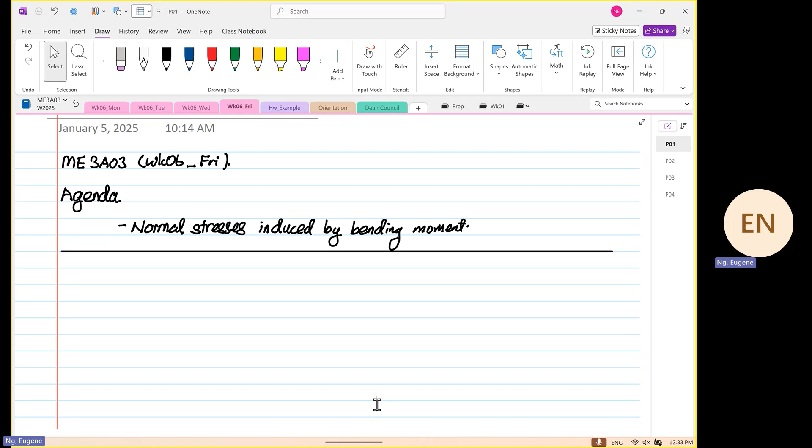Okay, as I say, tentatively, I have to change the date. I realize that some of you have a stats course. Okay, right. So today we are going to do something different. No more Mohr's circle. We will come back to Mohr's circle later on; we're going to apply it later on. So today we are going to look at normal stress induced by bending moment. So it's more of a, what do you call that? Revision. Some of you have taken 2P last term. It will be very quick. Those of you in engineering and management, you're like, oh, I've taken this about a year ago, I can't remember. Okay, don't worry. I'll get you up to speed.

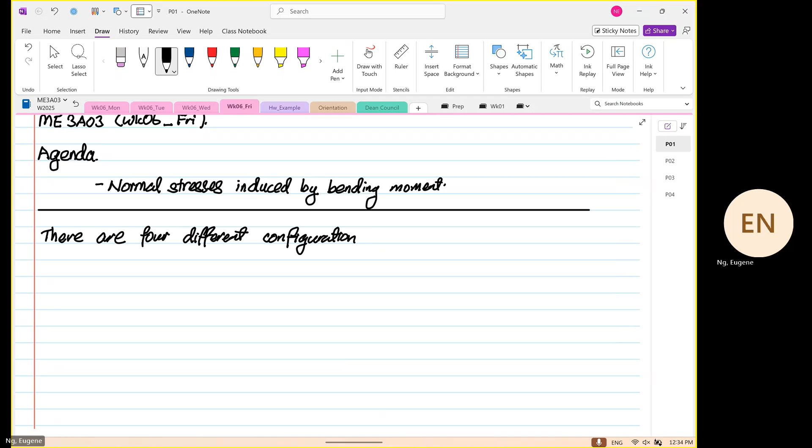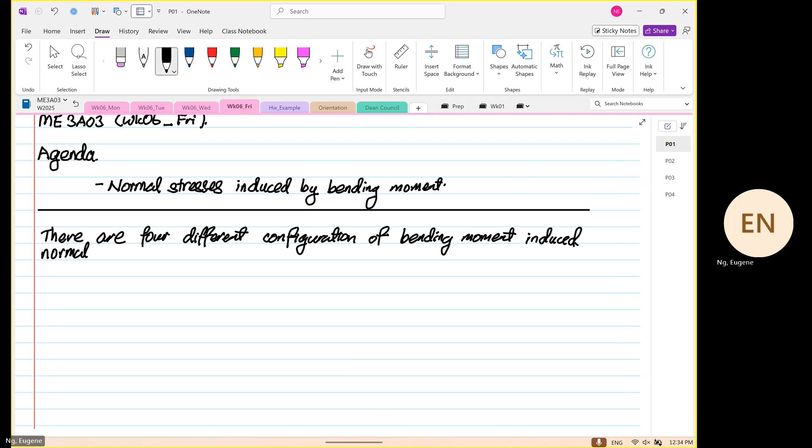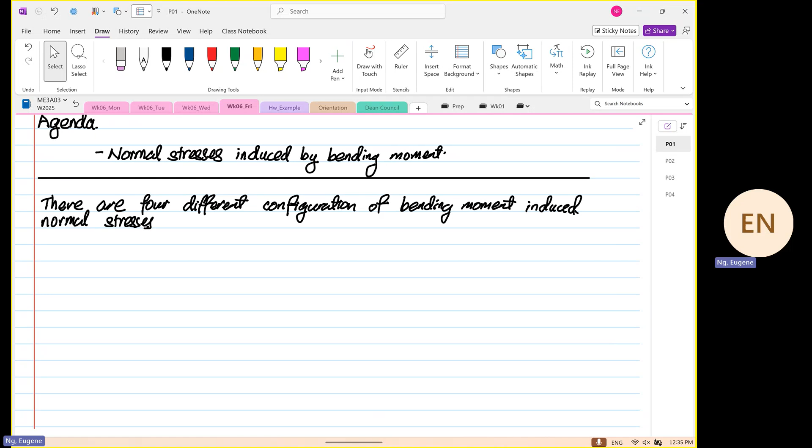Okay, so there are four different configurations of bending moment induced stresses, or induced normal stresses. Okay. So if I were to write out the general formula, stress X will be equal to Px over A plus minus My over Iyy multiplied by Z, and plus minus Mz over Izz multiplied by Y.

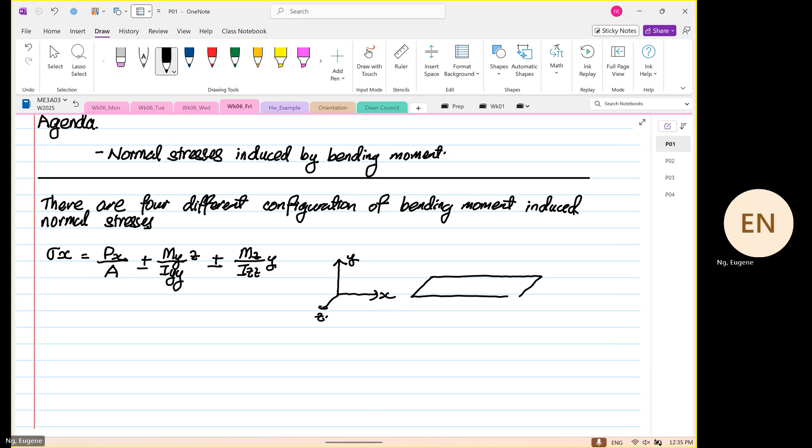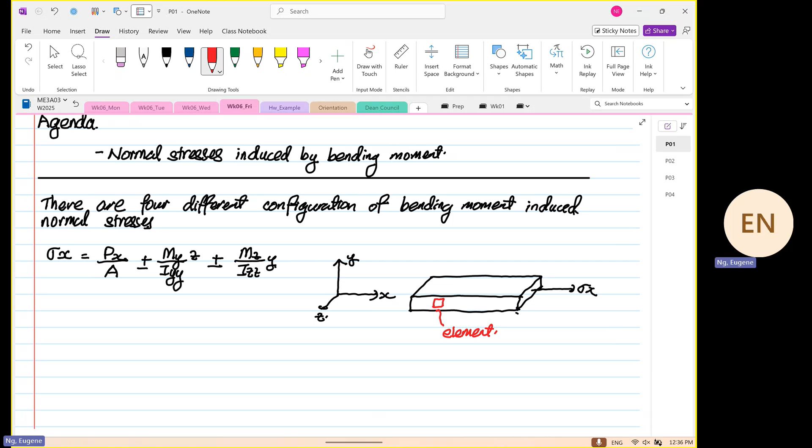Okay. So this will follow a configuration like this, where this is X, Y, and Z. And we have a structure looking like this. This is just an example. So the direction of stress X, as you can see, we are looking at stress X over here. So if we were to put an element like what we have learned before, this is an element now, to make you relate to what we have just learned. So that is the general form of the formula.

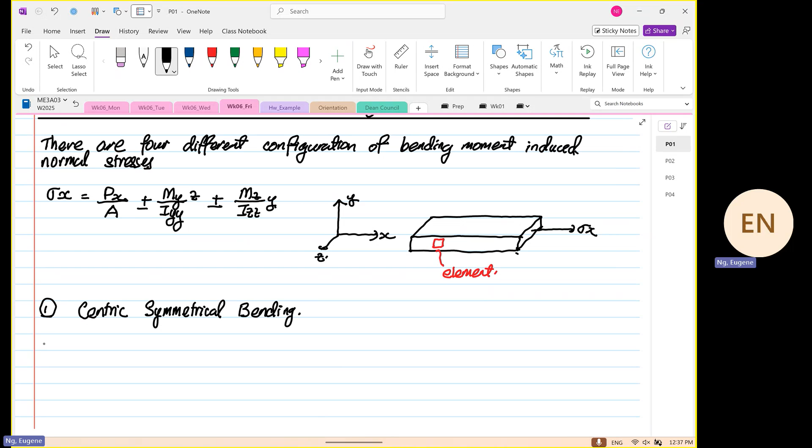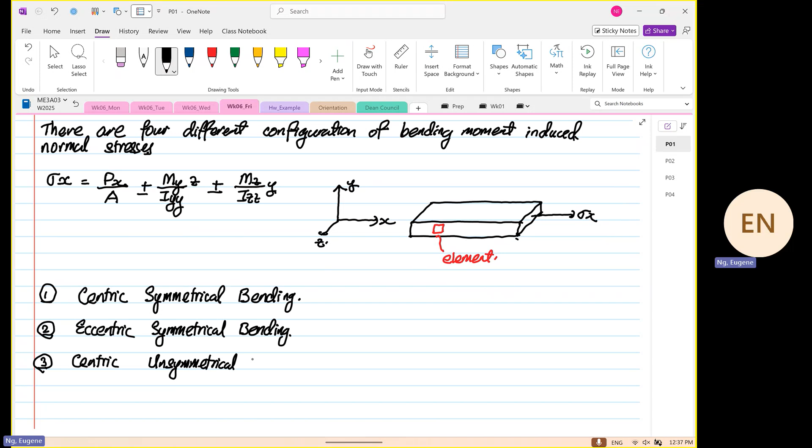So in bending moment, as I mentioned before, there are four different configurations. One is what we call centric symmetrical bending. The second one is what we classify as eccentric symmetrical bending. The third one is what we classify as centric unsymmetrical bending. And the fourth one is eccentric unsymmetrical bending. Okay.

So if we were to write the general formula for this, I'm going to build up on the formula. So let's say we have stress X in condition number 1, stress X in condition number 2, stress X in condition number 3, stress X in condition number 4. If we have something that is known as eccentric, we always have the term Px over A.

So i.e., anything that is eccentric has axial loading and bending moment components.

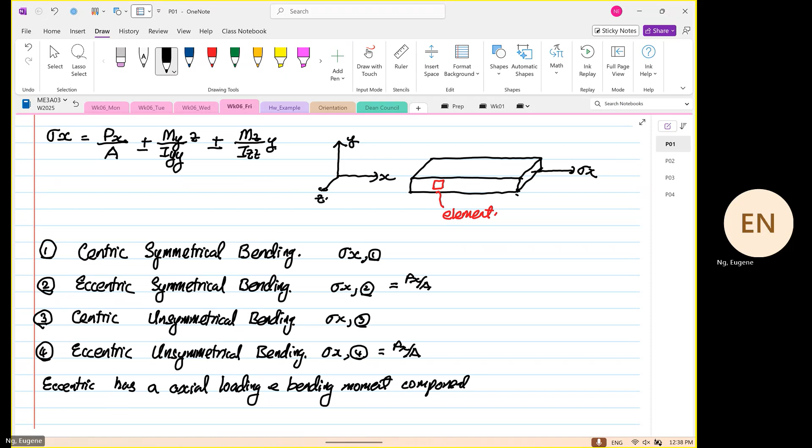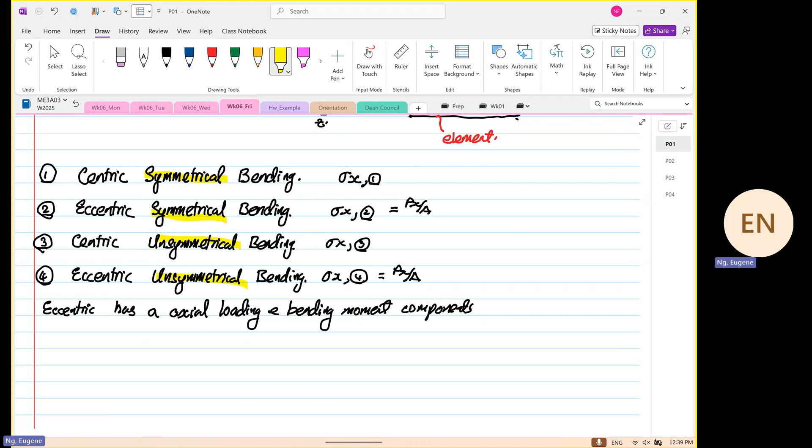Okay. Now it comes to the next term that you'll see, symmetrical and unsymmetrical. Yes or no? Those of you that have done 2P, Dr. Koshi will use the term symmetrical and what? Unsymmetrical. Now, when is it symmetrical and when is it unsymmetrical? Okay, so I'm going to draw cases, and you tell me, is this symmetrical or unsymmetrical? And we start from there. So now I'm going to draw 3 different loading conditions.

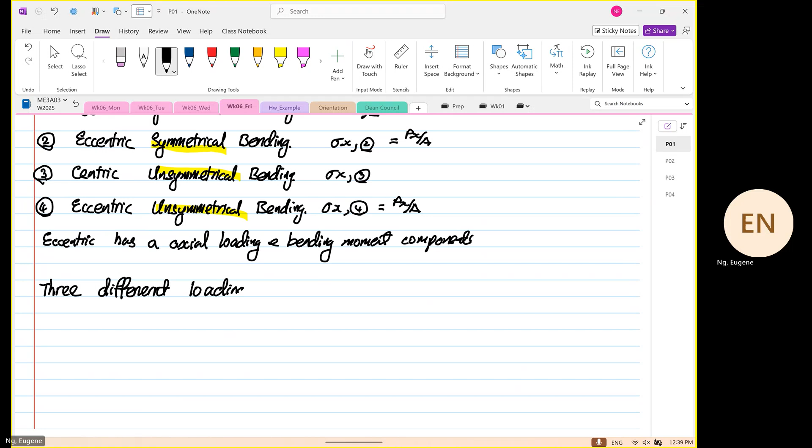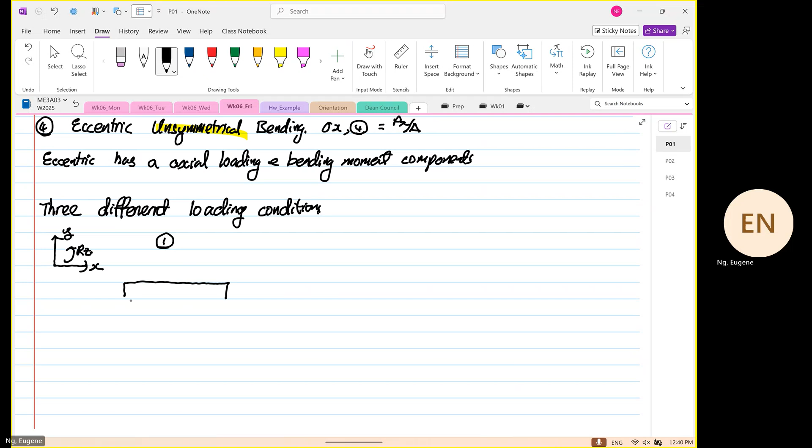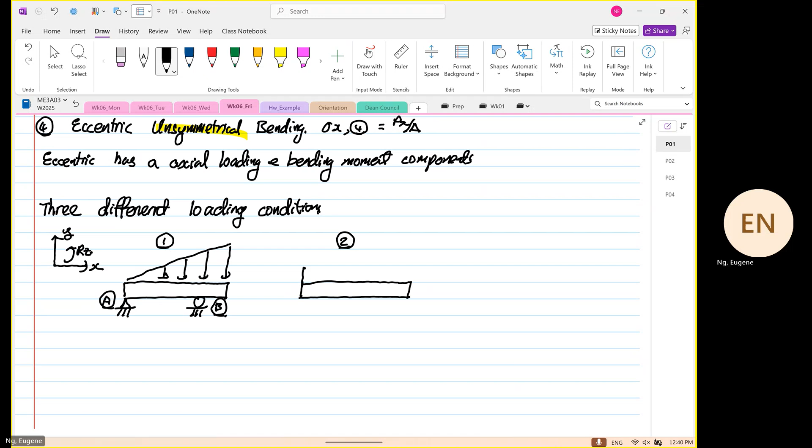Okay, so the first one looks like this. Before I do number 1, I'm going to declare that this is our X and this is our Y, followed by our rotation in the Z. So this is number 1. Number 1, you have a load looking like this. Point A, point B. And then the second one, we have a load looking like this. Point A, point B, okay?

And case number 3, we have a load looking like this. And I'll declare that from here to here is L/2, and from here to here is L/2, and this is our L. From here to here, this is L/2. From here to here, L/4. From here to here is 2L. And then from here to here is L. Okay.

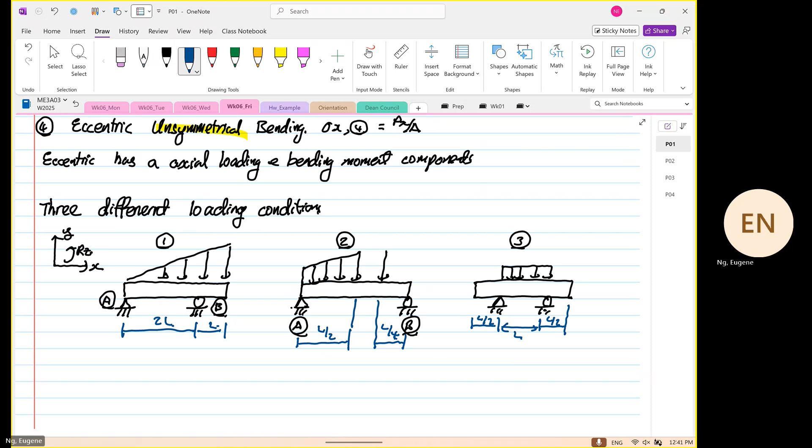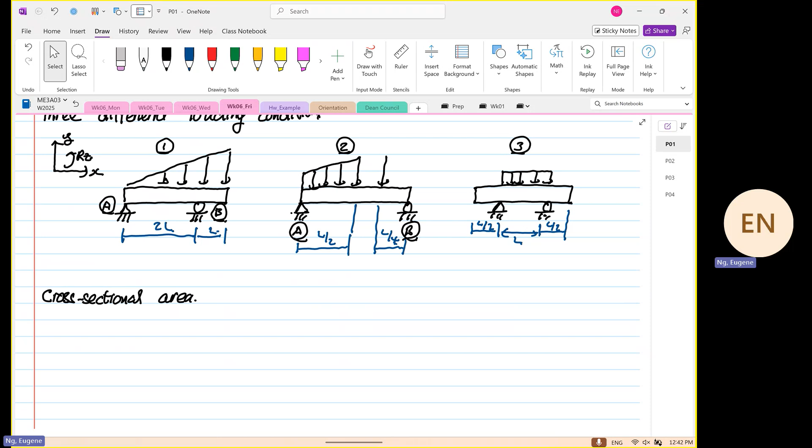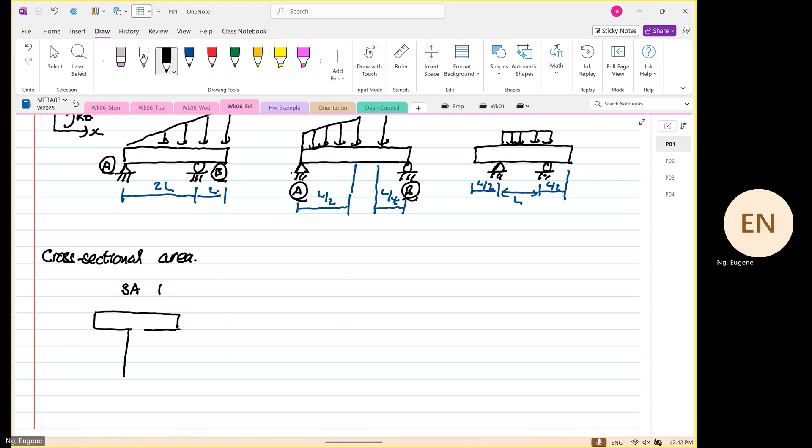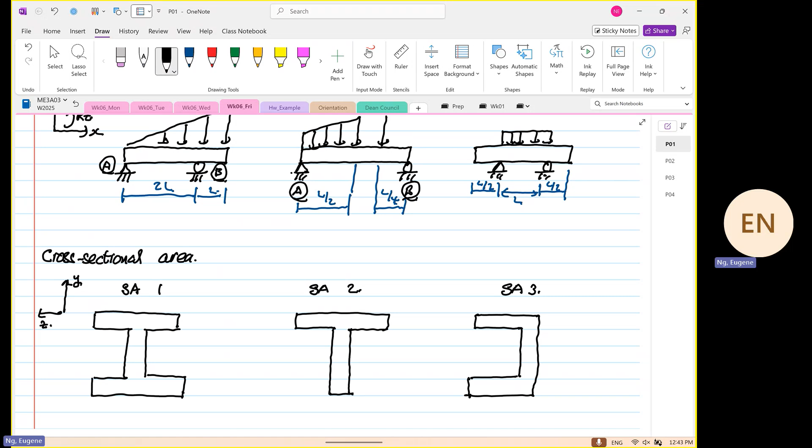Then the next thing that I'm going to draw for you, we are now going to look at the cross-sectional area. So we have our cross-section. Each of them will have 3 different cross-sectional areas. Sectional area number 1 looks like this. When I'm drawing this, can you please draw in the transformation? This is Y and this is Z. Cross-sectional area number 2 looks like this. Cross-sectional area number 3. Running out of ideas. It looks like this. And then this is our rotation about X.

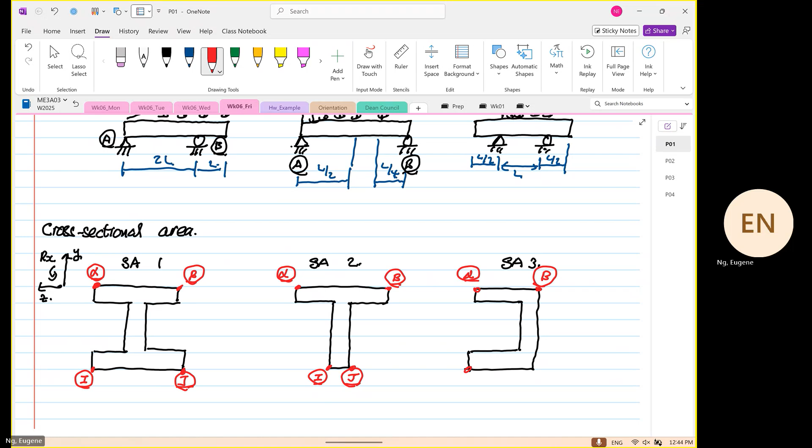So on the cross-sectional area, I want you to label this as alpha, beta, I, and J. Over here, alpha, beta, I, and J. Alpha, beta, I, and J. Okay. So each loading condition can have 3 different cross-sectional areas.

Now, let's look at the loading condition. We have number 1, number 2, number 3. Listen to me. Which will induce symmetrical bending moment? 1, 2, or 3? Anyone? Yes. Okay. 3. And why do you say 3? The loading is symmetrical. Okay. So we have pinpointed 3 as the loading that is symmetrical. So 1 and 2, for now, we declare as unsymmetrical.

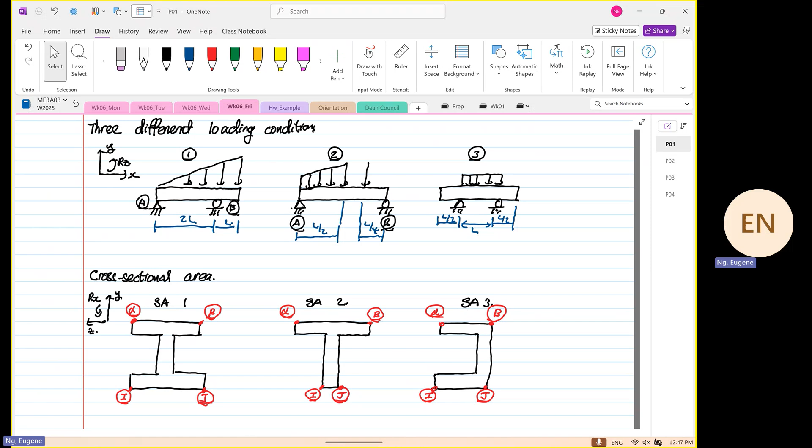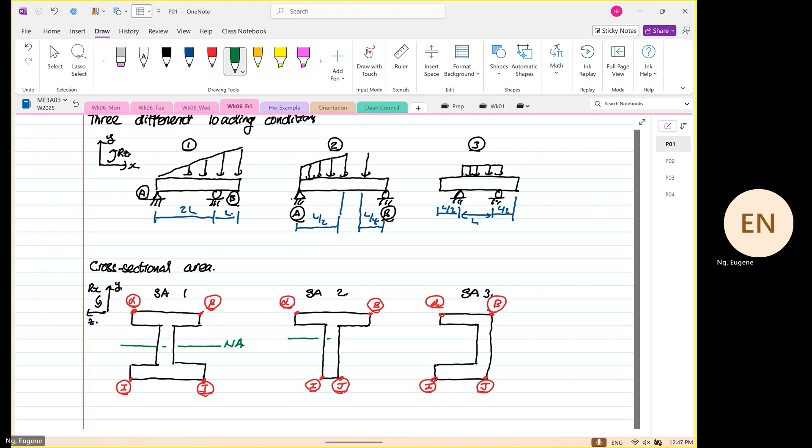Before we look at the formula, I'm going to look at the cross-sectional area now. So the cross-sectional area, I'm going to draw down here. This is our neutral axis. Over here, this is our neutral axis. And over here,